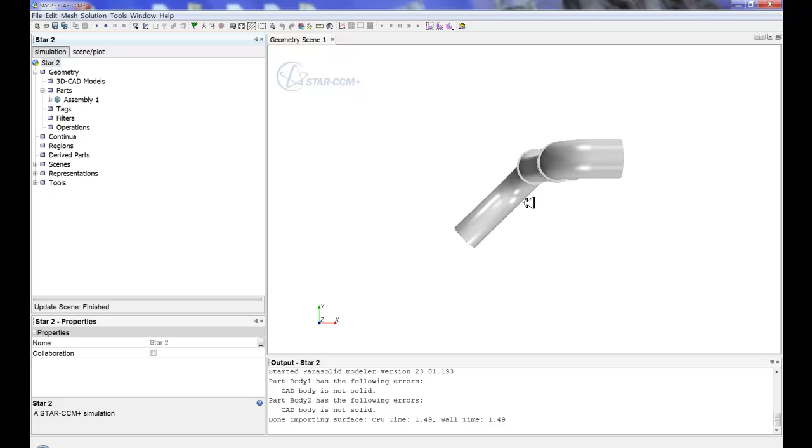Alright, so we've got a part here. Now this is a relatively old part and it's got some extra pieces of geometry in it, so I'm going to go ahead and start off by just dumping some of the stuff I don't necessarily need. I've got a hole fill on each end, and then I've got a sensor in there, and I don't really need them for this particular demonstration.

So what we have to do is, first of all, imprint all of our bodies on each other so that we have a topological connection between all of them, that we have a closed volume inside. Then we'll fill the ends, and we'll use an extract volume in order to extract the fluid volume internally. Now, traditionally, we just use a surface wrapper. Now we can use mesh operations to get to the same goal.

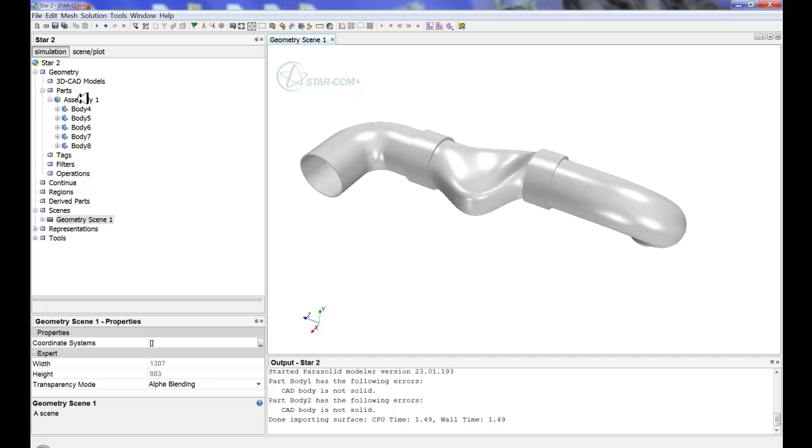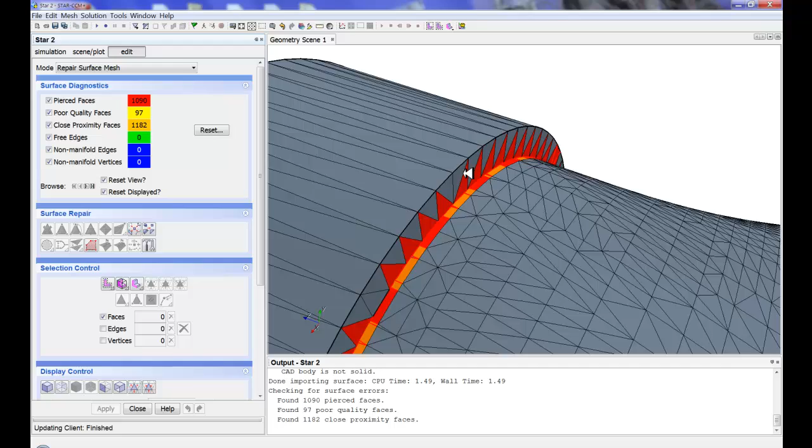All right, so step number one is always going to be to imprint your components. So go ahead and select them all and go into the repair tool. And once you're here, you can jump over to merge imprint. But in case you're curious, one thing you can always do is turn on the diagnostics, and what you'll be looking at is these pierced faces here. Because they're not necessarily connected to each other, they'll show up as pierced in the surface repair tool.

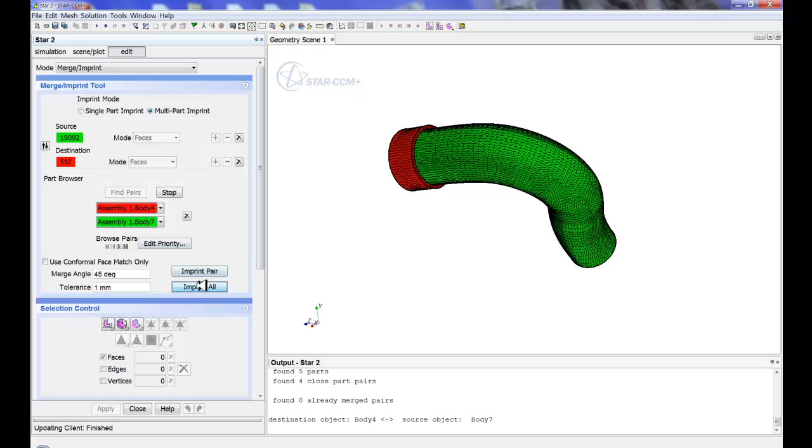So if I go over to merge imprint, multi-part imprint, then let's do something about 1 millimeter and find pairs. Let's go ahead and imprint them all. You can certainly go one by one if you're not sure. If you see any striations or jagged lines, you definitely want to go one by one.

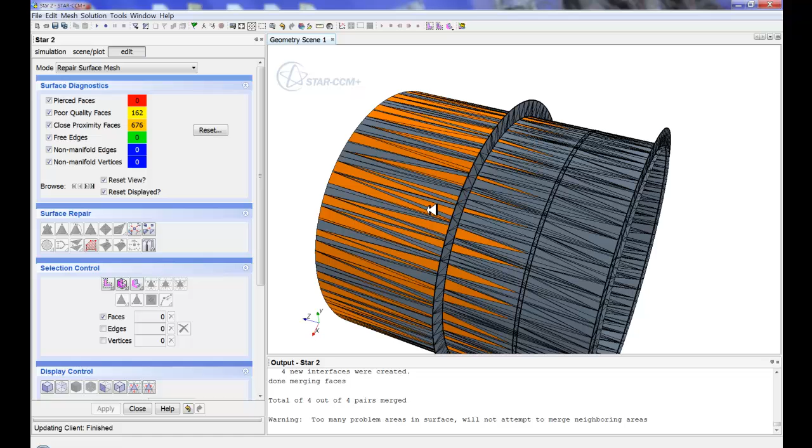But if I come back to my imprint, my repair surface, you can see all those pierced faces are gone, because now these surfaces are topologically connected. Yes, we have poor quality, but this is the import tessellation, so it's fine. All right. So now I've got my surfaces topologically connected. I need to fill holes.

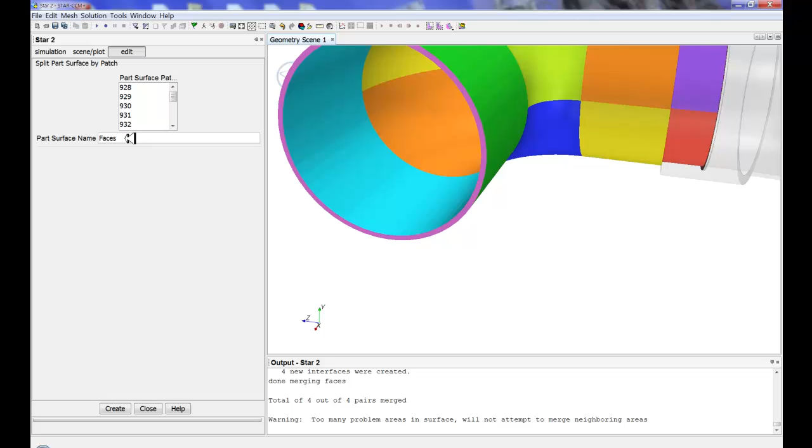In order to fill holes with mesh operations, you have to have some sort of delineation, whether it be an edge or a surface. And the quickest way is to do it with a surface. So we're going to split this off. The end. We'll call this the end. And we'll do the same thing over on the other side. We'll spin around here, put my patch, and we'll grab this end face. Call this one end as well.

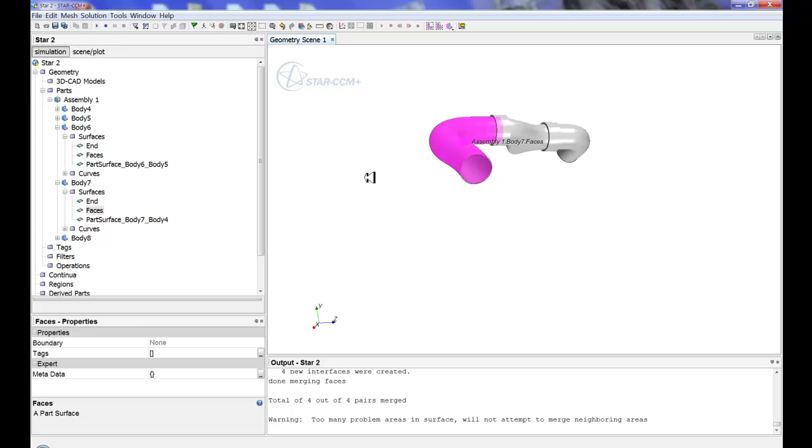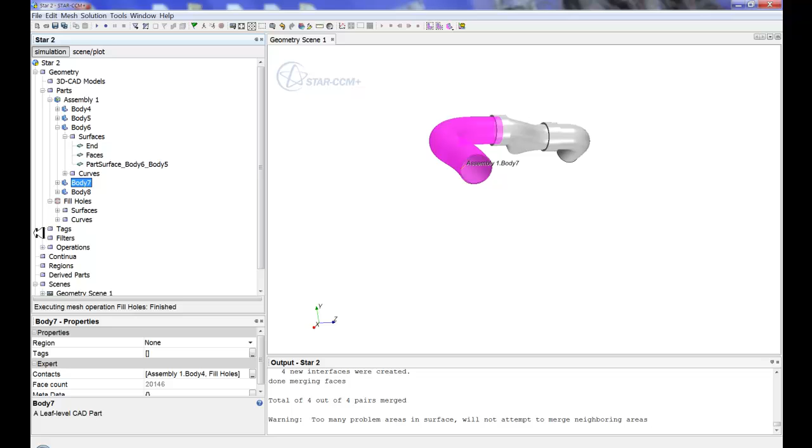Alright, so now that I have these two faces, what I can do is just select the part which I want to hole fill on, and do a mesh operation, fill holes, select an end surface here, and OK. And so what you'll see is now I have a new part called fill holes. And you can see this is one of the operations down below. So this is the end.

Great. So let's do that again on this side. So mesh operation, fill holes. And instead of having to expand everything, I'm just going to type end. And what you'll see is that it filters out just the piece that I want.

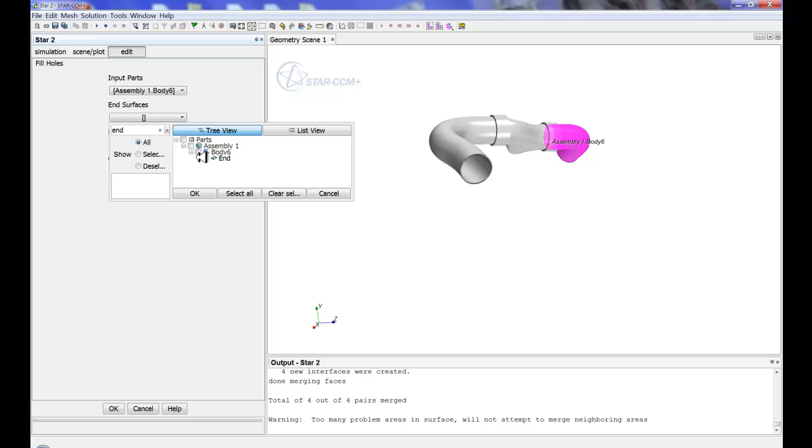Okay. So now we've got all of our parts. We've got two hole fills, one for each end. Then we've got all of our components. So what I want to do is extract the fluid volume that's defined by all of these parts. And notice I can select the assembly, and that selects all the parts within it.

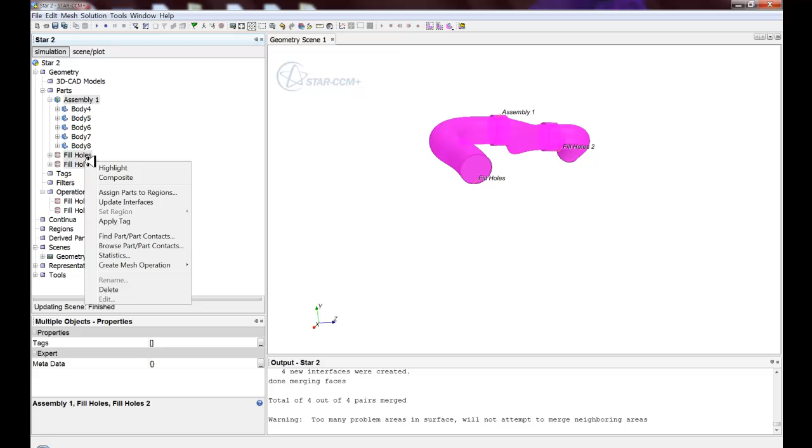So right click, and we'll do another mesh operation, and this one will be extract volume. Great. And sometimes you'll want to merge surfaces, but in my case, I don't want to merge surfaces, so I keep all the different boundaries of all the different parts. So hit OK. And now I have an extracted volume part. You'll see that's the interior fluid surface.

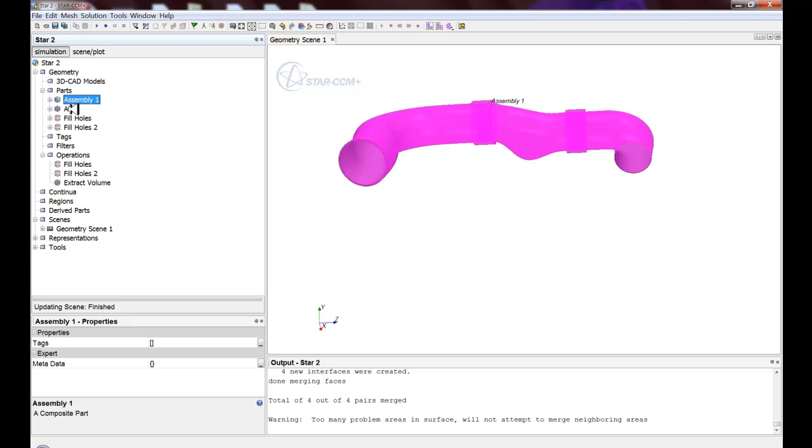So if I want to move on, I can go through and do, let's say for instance, just a flow only simulation. And that's pretty easy, but I want to do a CHT. So let's go ahead and do all of these. So I want all the parts. I want to assign parts to regions. But with 604, we can do things a little bit more fancy.

So in my particular case, I want the pipes to be one region, the couplings to be another region, and my air to be a third region. So I want just one region per part. So one region for all parts, one boundary per part surface. I'll create regions. So now I have an air region. You'll see here this is region 1.

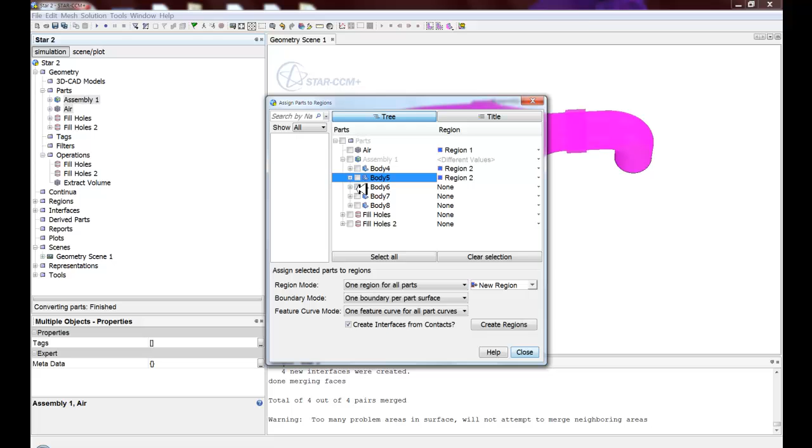So if I clear this selection, and I go and I select my two coupling regions, one region for all parts, one boundary per part surface, create. So those are both part of region 2. And finally, let's do our 3 pipes. Same way, create and close.

So now you'll see I have 3 regions, one being the fluid, the air. Then I've got my couplings. And finally, we've got our pipes.

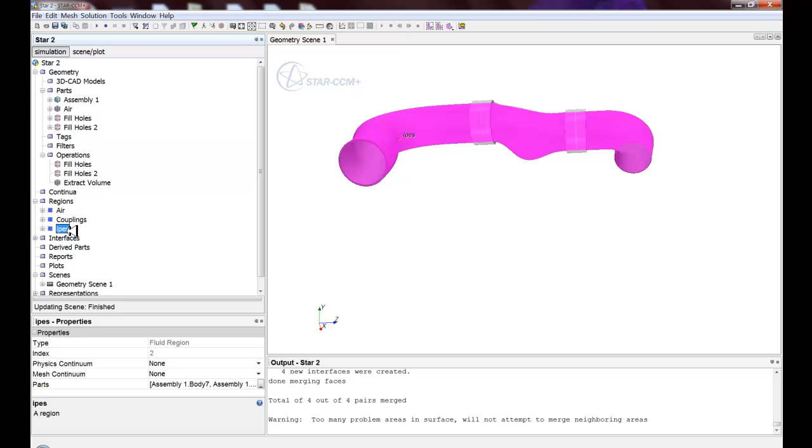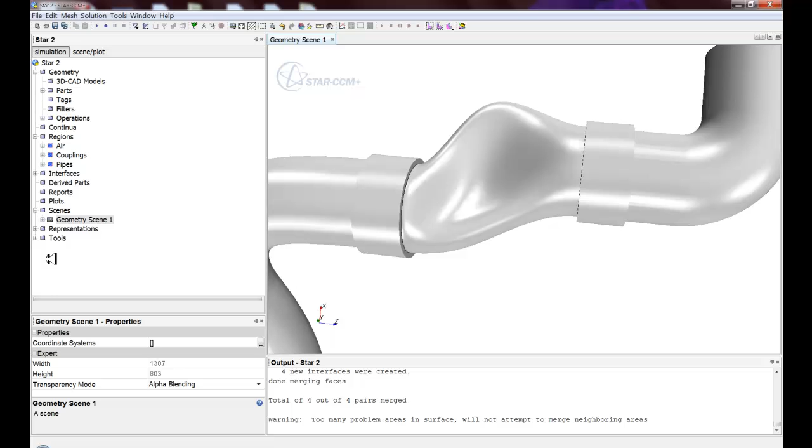Great. So what we can do now is go through the whole meshing process and set everything up, inlets, outlets, and all that. But for this particular exercise, what I want to do is look at how to replace an individual component. So STAR-CCM+ is built in such a way that we want to be able to replace a part and still have everything go down through the tree. So all your mesh conditions, all your physics settings, everything will run very, very quickly.

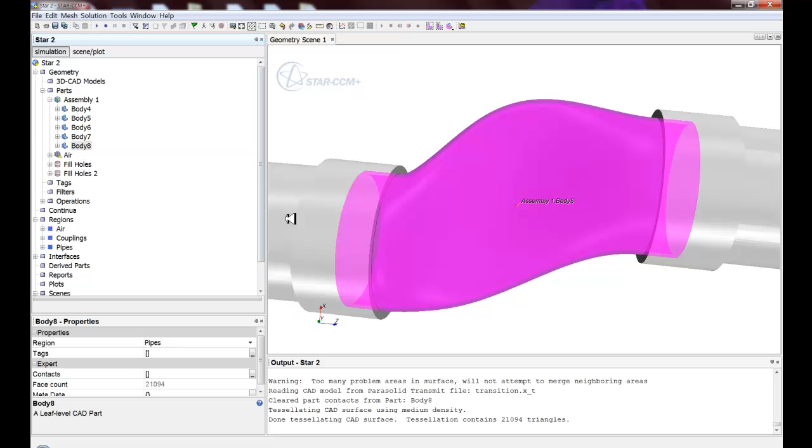So I need to replace this particular component, which is body 8, with another component. So I'm going to right click on it and I'm going to replace part. So go all the way down to the bottom here and let's grab another transition piece. So see, this is a different shape. Now, side note, when you replace a part, you need to reestablish the connectivity between all the different components.

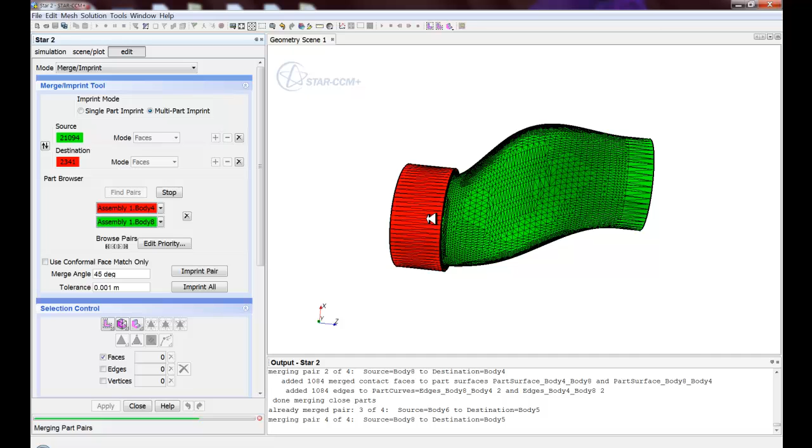So right click on your assembly, repair surface, and go back to your merge imprint, multi-part imprint, and we're going to find pairs again. And you'll find that some of them have already been associated, but the new part is not associated. So let's go ahead and imprint them all. And you should see a line here and a line here. Yep, there we go. So we have our new imprint.

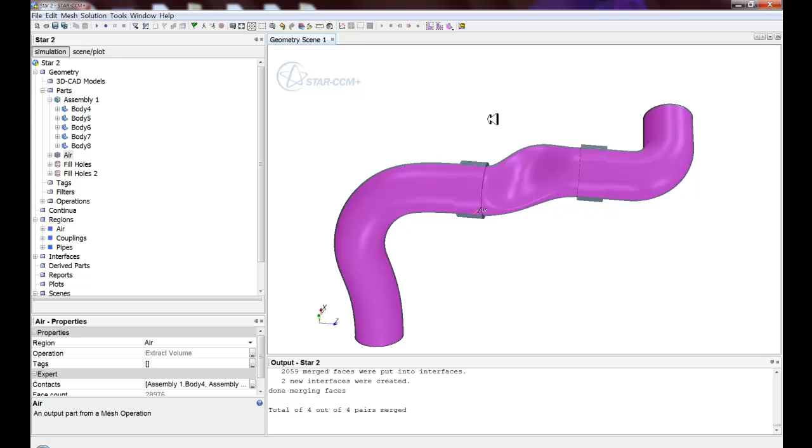So now when we rerun all of our operations, it should reestablish everything. So just go ahead and right click on operations and rerun. So now you'll see we get the air volume again with a new geometry. And all of this goes right down to the regions. So it goes into your mesh and your physics and your setup. So that's the quick way to go through and replace parts within STAR-CCM+ using mesh operations. Thanks.